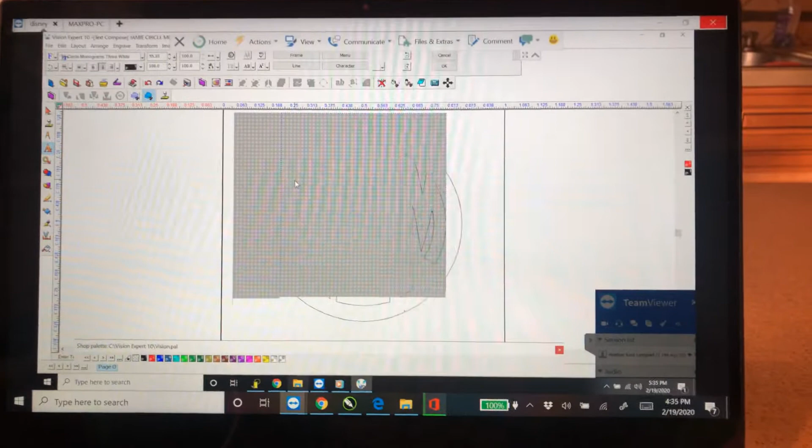There is a written out sheet back there that will tell you the third letter key. With circle monogram, it's different with the third letter. So my monogram is Heather Lynn Campbell, so it's HCL. I'm doing a lowercase h and uppercase C, and then I'm using Shift 1, Shift 2 is going to be my L.

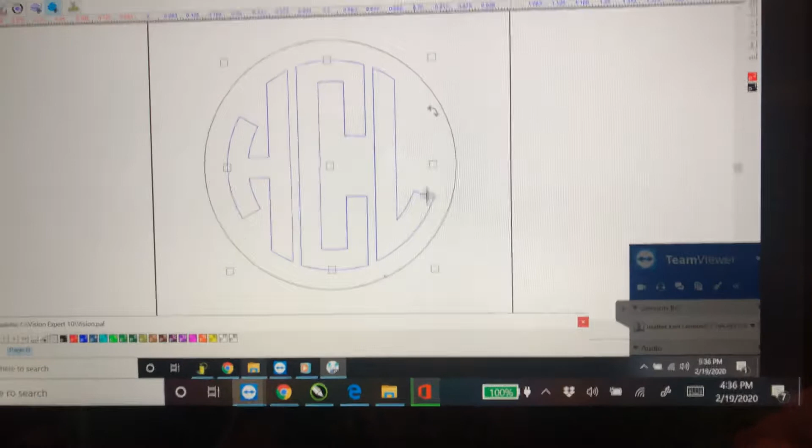Once you have the text in place, click somewhere off to the side of it, and you'll see it turns blue and has these tiny little squares around it. That means it's selected. With circle monogram, the next step is you want to go to the upper left corner, click with your mouse, hold it down, and drag a box over the entire monogram.

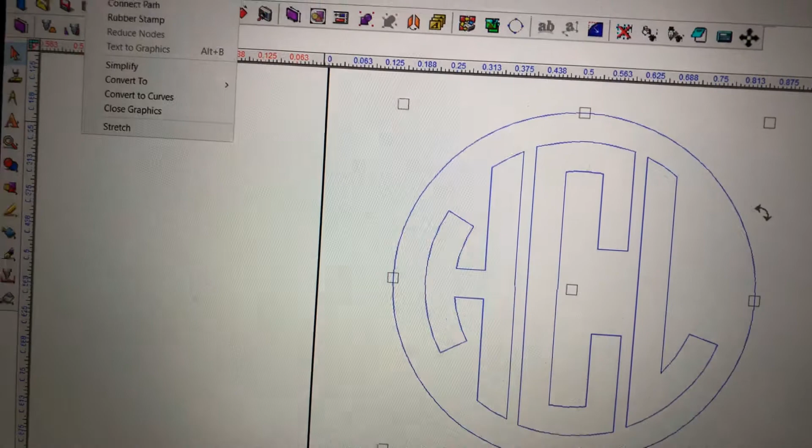So as you see, the blue circle and the HCL are highlighted in blue. You're going to go up to the top column, go to Engrave, go to Text to Graphics. We need to change that text to a graphic design. Go right back into Engrave and go to Connect Path and say OK. This will connect the circle with the letters, and this is going to allow us to reverse engrave this image.

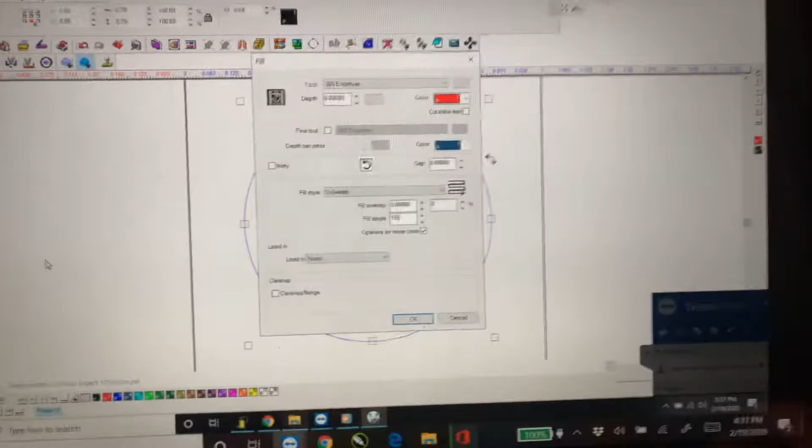So over on the left corner from here, you go to Toolpath Tools, and we're going to go into the fourth one in where it says Fill. We do want a tool of 005 engraver, and there's a fill angle of 155. Great, hit OK.

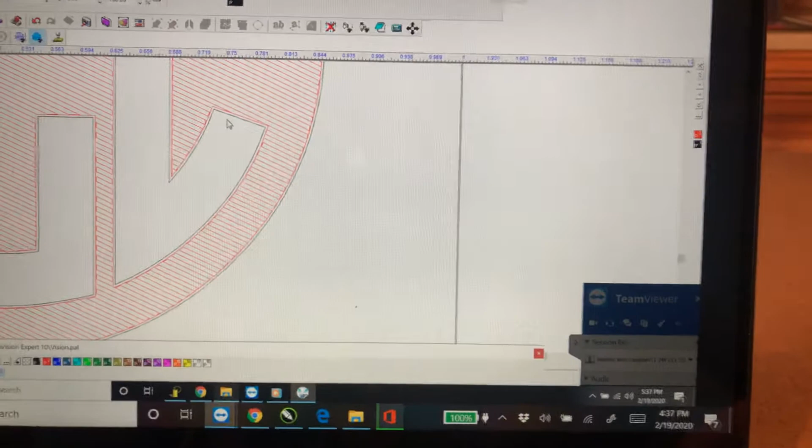So everything's in blue, so I'm going to click somewhere outside. That's the first pass of our reverse engraved circle monogram. I want you to zoom in now, and if you notice, this part's black - that's the outline. I want you to get in there and click it with your mouse so you only grab and select the outline. It should turn blue.

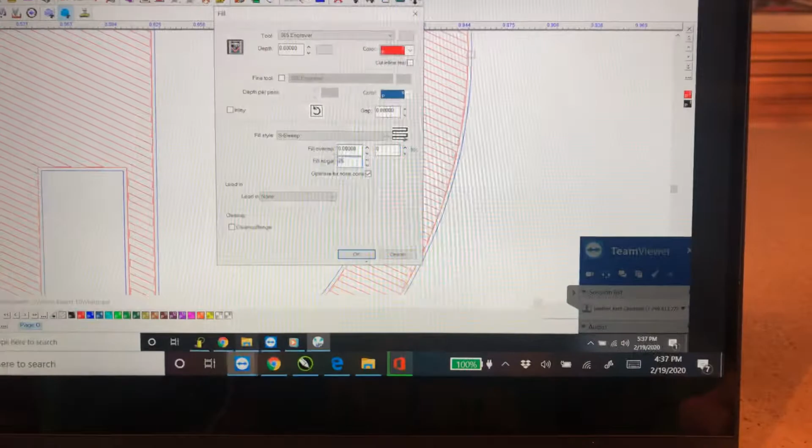Go right back over to Toolpath Tools, go to the fourth one in, it's Fill. Now change your fill angle to 25 and hit OK. This creates that cross-hatched look of that design.

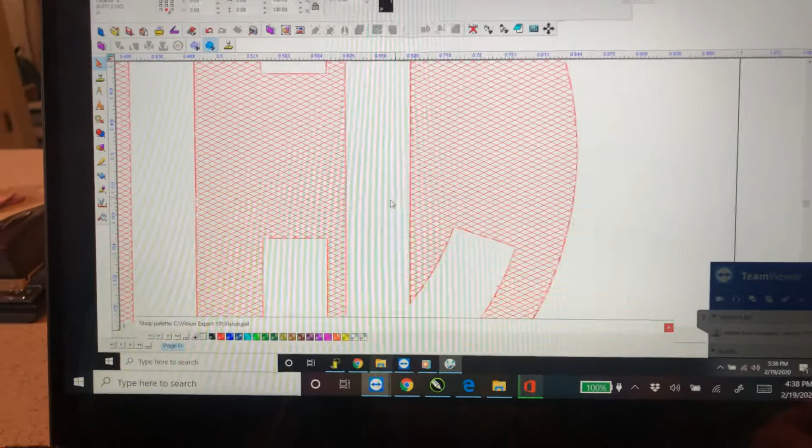Click somewhere outside, grab that outline again, it will turn blue, and delete it off. Make sure your design still has that crosshatch, or else you probably deleted part of the fill style. So I'm going to zoom out, and that's the completed project.

So from this point, I'm going to take my mouse, click and drag a box over the entire image to select it, and hit Control-K. You didn't see anything move there, but Control-K will center my image. Now I'm going to do it again now that I moved it. It's centered, and at this point you'd go to the second from the top down and go ahead and start your engraving.